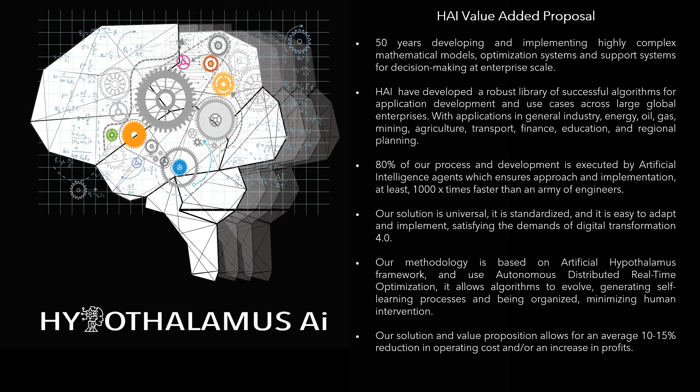It allows algorithms to evolve, generating self-learning processes and being organized, minimizing human intervention. Our solution and value proposition allows for an average 10 to 15% reduction in operating cost, and/or an increase in profits.

Oil supply chain optimization. The oil and gas supply chain is made up of 4 links: upstream, midstream, downstream and retail. The links are connected by multimodal transport networks.

The oil industry includes global processes of exploration, extraction, refining, transportation and marketing of petroleum products. The largest volume products in the industry are fuels, natural gas, fuel oil, and gasoline.

The distribution chain of petroleum products begins in refineries, and ends at the sites of consumption of different types of products.

Optimization solutions in the transport chain of petroleum products can be classified by their hierarchy: strategic, tactics, and operating. Several of these applications will be discussed below.

Hierarchical coordination of planning tools. It is traditional to organize decisions hierarchically into strategic, tactical and operational. The operational decisions are divided into scheduling and advanced optimal control.

However, due to the technological progress generated by Industry 4.0, mainly in relation to smart metering systems, nowadays we can talk about a new type of online optimization modeling: real-time distributed optimization.

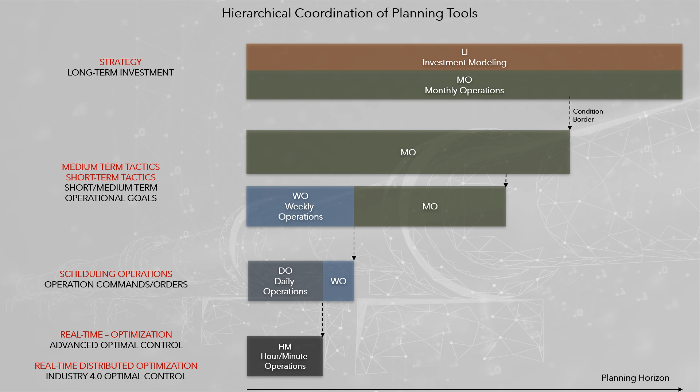The modeling strategy of HAI is that all models of a decision support system can communicate with each other.

HAI Oil meets all the software solutions developed by HAI in different areas of application of mathematical optimization models, oriented to planning and to scheduling operations, in different business of the petroleum product supply chain.

Oil enterprise-wide optimization integrates mathematical models for each of the links in the oil supply chain, in such a way to manage the planning of the supply chain with a holistic vision.

The design of HAI Oil EWO was the result of work done for a multi-business oil company. The union of models, and their coordination, forms the hypothalamus of an oil enterprise.

The current computational power allows us to model the supply chain in detail, considering individually all the systems that compose it. This allows us to visualize all the existing bottlenecks that affect the maximization of economic gains.

All models developed by HAI, to support decisions in the oil industry, are interconnected through an information system. In this way the construction of the artificial hypothalamus is a question of joining the equations that make up the different models.

Oil transport systems optimization corresponds to a general model, common to all types of oil products: raw, refined, natural gas and biomass, which represents the process for a specific system, including particular equations when required.

It considers 2 types of transport modes: pipes and multimodal vehicles, like vessels, barges, train tanks, and/or truck tanks. The integrated transport system can be conceptualized as the junction of pipe and vehicle routes, which interconnect multiple terminals.

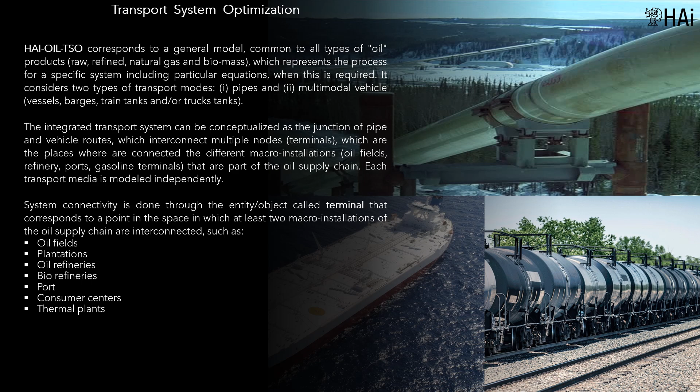System connectivity is done through the terminal, a node, that corresponds to a point in the space in which at least two installations are interconnected, such as oil fields, plantations, oil refineries, biorefineries, ports, consumer centers, and thermal plants.

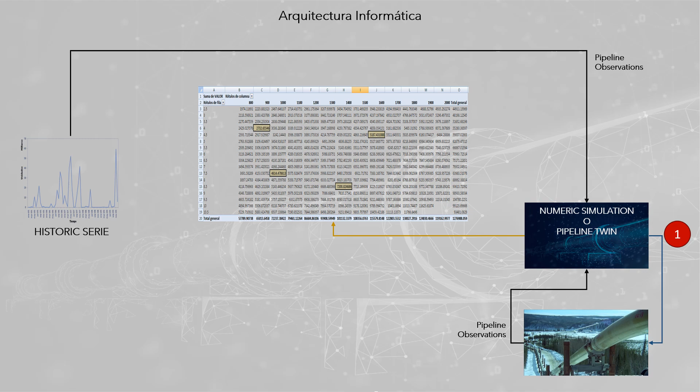Validate and correct advanced analytics models, mainly optimization models. State estimation models the prediction or estimation of the variables that represent the state of the system. These can be pressure, flow, RPM, roughness, density, etc., and physical model parameters: estimation of the parameters involved in the equations that represent the physical system, and which are subject to uncertainty.

It is considered that the appropriate methodology is the Kalman filter, KF, including some of its variations and extensions. KF is, perhaps, the oldest, and most robust, methodology of hybrid predictive AI.

The numerical simulation model can be used to generate synthetic operation samples, as it is assumed to correspond to the exact representation of the system, and thus enrich the database, very useful in the case of young systems with few historical measurements.

Prescriptive analytics. To optimize, the following models are required: the operation, dispatch, of the pipeline, at least 1 or 2 days in advance. This implies a real-time operating model, whose planning horizon is divided into periods of hours, fractions, and which can be redispatched at any time, and the transport of hydrocarbons in relation to nomination, DRA dosage, energy consumption month by month.

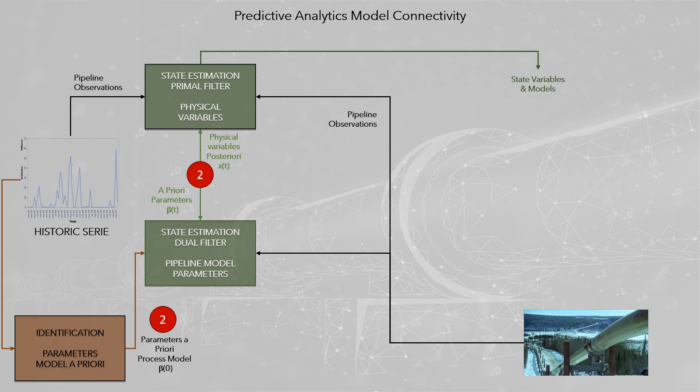Data-based algorithms only consider the database of observations, historical or synthetic, to determine the dynamic prognosis of the physical process. Normally, the related professional is a data scientist.

Model-based models are based on the numerical simulation model, which must be fitted by means of algebraic expressions, to be expressed as a system of stochastic differential equations, or finite differences, or finite elements. This requires an expert in the field of interest, in this case fluid mechanics, mainly in the transport of petroleum products.

The integration of the two approaches gives rise to hybrid predictive analytics, which can be considered as the appropriate method, that takes advantage of the mathematical knowledge of the physical system, and historical information.

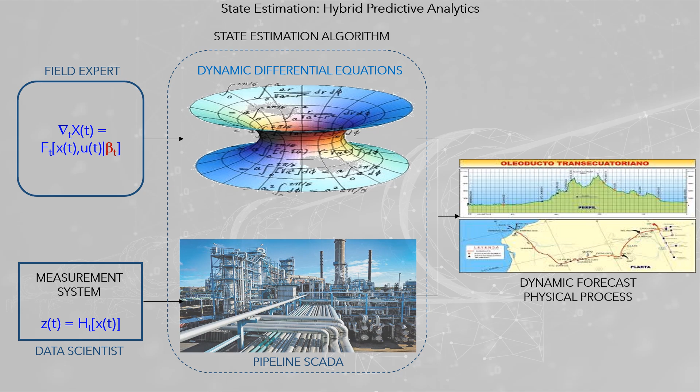The most well-known method, and most used, for more than 65 years, is the Kalman filter. The state estimate describes the system based on state variables, characterized by discrete, empirical probability distributions, and dynamic, empirical, probability distribution functions that evolve over time.

Forecasting, predictions about the future, and filtering, predictions for the present. In a system under uncertainty, correcting the past may be just as important, if not more so, than forecasting the future and estimate the present.

Examples of applications of the Kalman filter in pipelines are system monitoring, parameter calibration, leak detection, and maintenance following PHM methodologies.

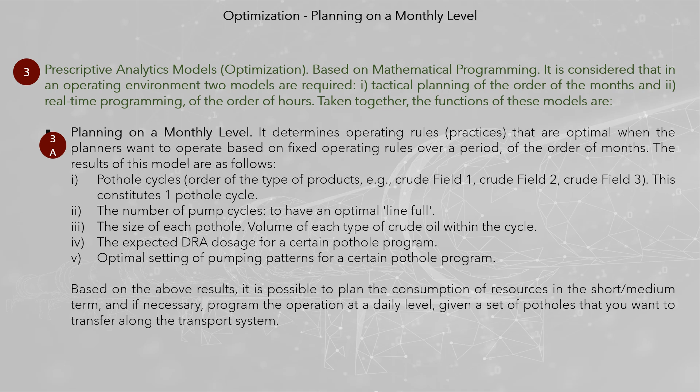Based on the above results, it is possible to plan the consumption of resources in the short-medium term, and if necessary, program the operation at a daily level, given a set of potholes that you want to transfer along the transport system. Daily scheduling determines the optimal operating conditions for a planning horizon of the order of days.

Specifically, it is expected to define operation schedules up to 3 or 4 days in advance. The results of this model are as follows.

Pumping plan at each pump station, optimal pump configuration pattern for the pump stations, and RPM at each pump. Contribution of DRA at injection points, in each period of the planning horizon, and the flow and pressure variables along the pipeline, which can be visualized in the pipeline digital twin.

The two models share equations and processes and differ in the specific characteristics of monthly, tactical, and daily, real-time, planning. The objective function of the models may vary according to the criteria of the decision maker, as well as minimize cost of operation, minimize energy consumption, and maximize oil products transfer.

The models, together or individually, can be used to support other decisions related to the operation of the transportation system. For example, supporting the ATP, available to promise, decision to accept or refuse transport operational volumes for customers who request it, without having a prior agreement.

To solve the mathematical problem of optimizing prescriptive analytics of a system, several approaches can be used: mental models, intuition and goodwill, simulation, physical model plus human reasoning, meta-heuristics, smart rationing, machine learning, experiences, best practices, and mathematical programming, physical model plus optimization mathematics.

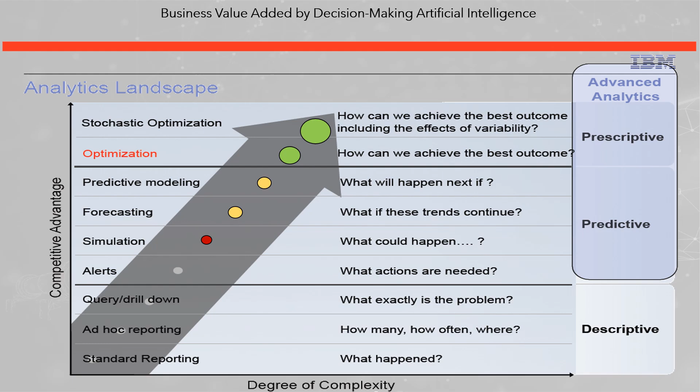Pipelines planning and scheduling. Compared to other transportation modes, like road, railroad and vessel, pipelines are the safest and most economical way of conveying petroleum products over long distances, day and night.

During the last two decades, operational multi-product pipeline scheduling has gained increasing attention. The problem of optimizing pipelines involves safe, reliable and economical operation, in which, for each moment of the planning period, the flows, pressures and configurations of the pumping stations must be determined, according to the different types of products that must be transported through the pipeline network.

The goal of the operation moves between two criteria: minimize energy consumption, an environmental criteria important to preserve the sustainability of the planet, and minimize the cost of energy, an economic criteria important in energy markets where rates change throughout the day.

On the other hand, the technical operating conditions, hydraulic conditions along the pipelines and at the pumping stations, must be respected regarding the flow of multiple different batches that must flow through a network of pipelines that involves the synchronization of multiple sections connecting several production fields, refineries, and ports.

The transportation system has two fundamental components: the pipeline system and the pumping stations. The planning and scheduling of transport operations of products through pipelines, oil and refined products pipelines, aqueducts, gas ducts, and mineral pipelines, is done using three coordinated models.

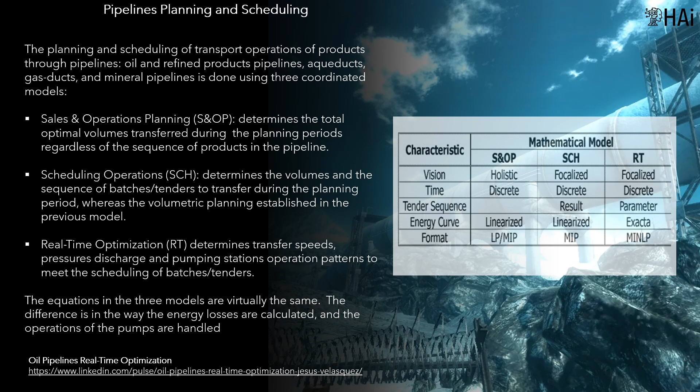Real-Time optimization, RT, determines transfer speeds, discharge pressures, and pumping station operation patterns to meet the scheduling of tenders. The equations in the three models are virtually the same; the difference is in how the energy losses are calculated and how the operations of the pumps are handled.

Discrete time and continuous time modeling. There are two alternatives for modeling operations scheduling: discrete time models and continuous time models. Continuous time modeling coordinates in detail the beginning and end of all activities that are part of an operations plan.

The conceptualization of this modeling is generic, in the sense that it can be applied to any detailed operations programming of a production system. The effort in modeling is greater than in discrete time, and it is less known by mathematical modelers. Its direct application is in real-time models.

Discrete time modeling divides the planning period into periods, usually of equal duration, and determines the average conditions in which the production system must operate. This modeling is better known, and traditionally used for tactical planning.

If greater precision is required in the results, the duration of the periods must be decreased, which increases their number, which entails problems of greater dimensionality.

Any of the above methodologies may be useful in solving real problems. The suitability of its use is determined only after a detailed analysis of the matrix structure of the optimization problem is performed. The real-time models include nonlinear modeling that determine the amount of energy consumed based on the flow of products in the system.

In aggregated models, when multiple types of products can be transported in the pipeline, the total transport time must be divided into the time used to transport each type of product at different transfer rates.

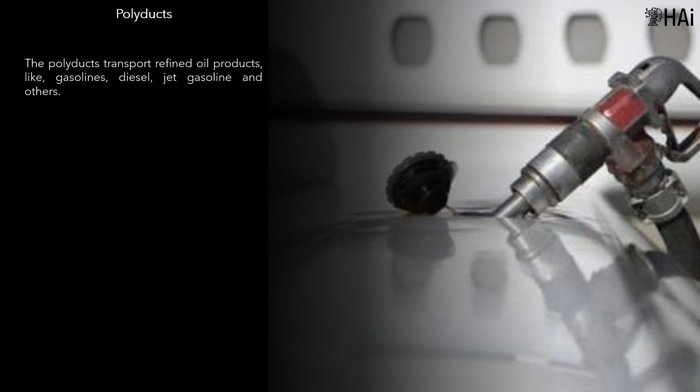Three types of pipelines exist: oil pipelines, which transport crude oil from oil fields and ports; polyducts, which transport refined oil products like gasolines, diesel, jet fuel and others; and gas pipelines, which allow combustible gases, natural gas, and liquefied petroleum gas, to be transported on a large scale and over a long distance.

The optimization mathematical models for pipeline transport systems can be used with one of the following objective functions: minimum power, minimum cost, and maximum flow.

Optimization strategy. The problem-solving methodology must speed up the optimization process. The chosen method is based on problem breakdown for the different periods that make up the planning horizon.

The synthesis of the behavior of pumping stations by means of a convex hull for variables that synthesize their optimal operation as a function of pressure, P, and flow, Q, for a given type of product associated with the batch, and coordination of the optimal solution using a Lagrangian coordination scheme.

The purpose of this is to iteratively solve significantly simpler problems that allow solving the original problem in significantly shorter computation times. After several analyses and numerical experimentation with mathematical models that represented the detailed problem, the following design principles are reached in order to make the solution of the problem viable as specified.

Split and decompose the problem into multiple problems of lower dimensionality in order to obtain the solution based on an iterative process. Maintain the format of the problems as linear or quadratic to take advantage of solvers specialized in this type of problem.

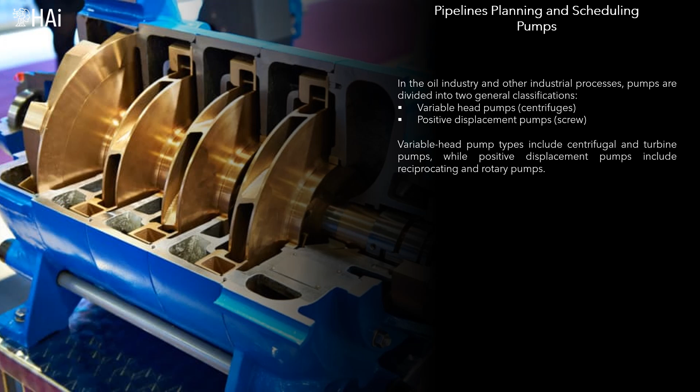The screw pump is one of the commonly used rotary-type pumps in the oil industry, and is mainly used in low-flow operation, where the efficiency of a centrifugal pump would be very low. On the other hand, the versatility in handling high-pressure heads makes the centrifugal pump the most used in industrial applications.

The effect of a pump on a system is to increase total energy. The action and operation of a pump is defined in terms of its characteristic curves. These curves relate the capacity, or flow, of the pump, in volume units per unit of time, versus the discharge pressure.

The equation that represents this ratio is obtained from the characteristic curve of the pump, which is provided by the manufacturer. This curve is generated for a pump rotation speed and for a characteristic viscosity of a reference product, usually water. This implies that, to determine the coefficients of the actual pumping curve, it is necessary to adjust the coefficients of the characteristic curve, based on the viscosity of the fluid that is pumped.

If the pump rotation speed changes, adjustments must also be made to determine the actual operating conditions of the pumping station. When a defined flow is required, and knowing that the system curve varies, it is necessary to affect the pumping curve, and thus find a new point of operation that meets the safe flow and pressure needs for the system.

The pumping curve can be affected in different ways; each pump with a variable speed motor can affect its pumping curve by changing the rotation speed. The figure shows three pumping curves for different rotation speeds of the engine associated with the pump, usually measured in RPM.

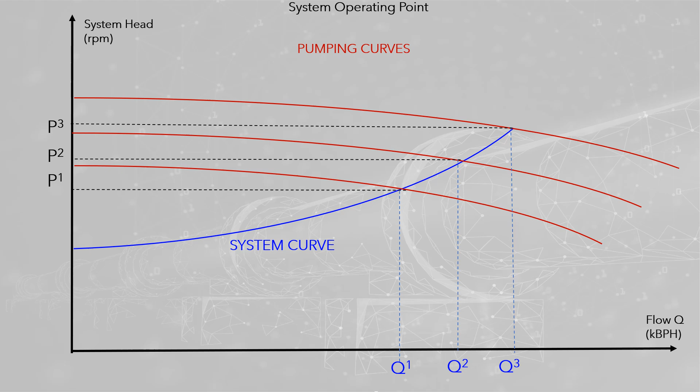The curve presents the relationship between energy consumed, or outlet pressure, and output flow in a pump. The relationship is exponential, implying diseconomies of scale in energy consumption as a function of flow. In theory, the pump has no limit in flow, but for an infinite flow rate, it would require infinite energy.

On the other hand, it is normal that there is a minimum flow rate, so that the pump begins to operate. The curves depend on the product transported. To the extent that it is heavier, denser, more power is required for the same flow. This applies to petroleum and petroleum products, that is, the curve depends on the API grade.

A pumping station is composed of multiple pumps, usually of the same type. While the atom of the system is the pump, it is necessary to analyze the behavior of the station as a machine, whose function is to pump a product at a certain transfer rate and at a given pressure.

The pumping curve is determinant of the operation of the pumping stations. A way to affect the pumping curve is by setting up a pumping pattern at a pumping station where there are multiple pumps. Configuration shapes are two: in parallel, and in series.

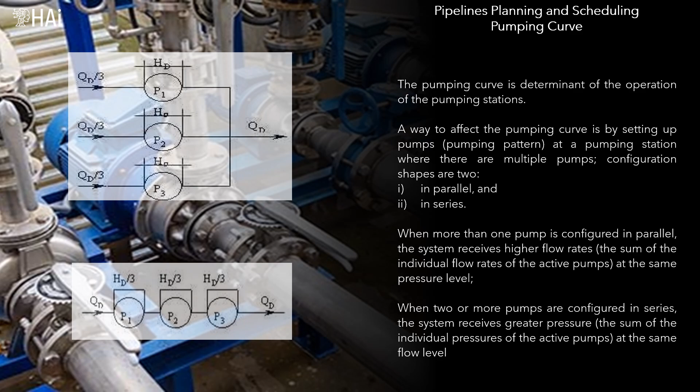In parallel, and in series. When more than one pump is configured in parallel, the system receives higher flow rates, the sum of the individual flow rates of the active pumps, at the same pressure level.

When two or more pumps are configured in series, the system receives greater pressure, the sum of the individual pressures of the active pumps, at the same flow level.

There are multiple operating patterns to configure the pumps of a pumping station. Its discrete character implies that selecting the more convenient one corresponds to a combinatorial mathematical problem. An aspect to consider is related to the type of pumps and the operating restrictions of pumping systems.

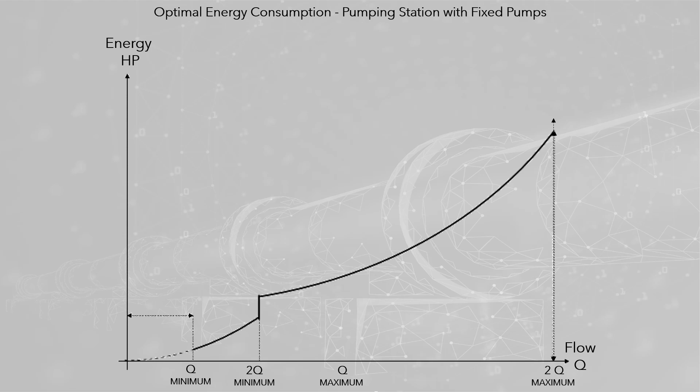The behavior is different with fixed pumps, as they cannot regulate the minimum flow rate, and must lose energy in a dissipating valve that allows excess energy to be released. The two cases involve non-convexities in the optimal consumption curves.

It can be noticed the flows that force the ignition of a new pump, which generates a discontinuity in the curve. This complicates the solution of the problem, since for such flows, the curve has two values.

A fundamental aspect of optimization models is the definition of the feasible zone. In most problems this is not complicated. However, in the case of pumping stations, it is necessary to carry out a detailed analysis. The greatest complexity is generated because the feasibility zone depends on the configuration of the pumping station, making the feasibility zone a disjunctive constraint.

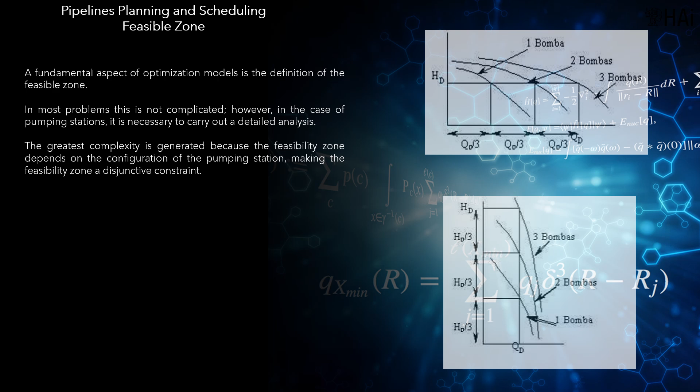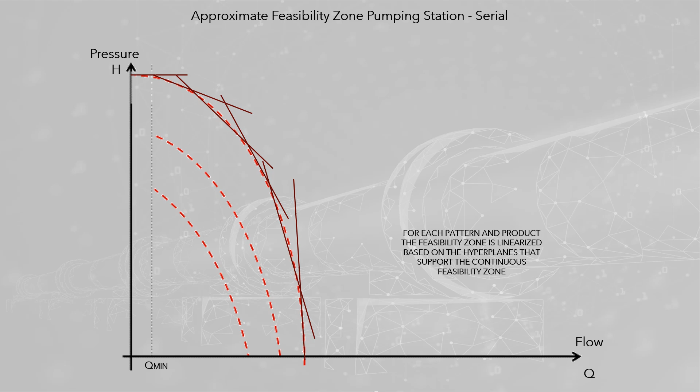Given the non-trivial form that gives rise to calculations, to represent the pumping feasibility area, the pump curves can be replaced by an algebraic function based on parameters, estimated through a least squares model. The polynomial function, or directly the empirical function, may be approximated by a piecewise linear function. For each pattern and product, the feasibility zone is linearized, based on the hyperplanes that support the continuous feasibility zone.

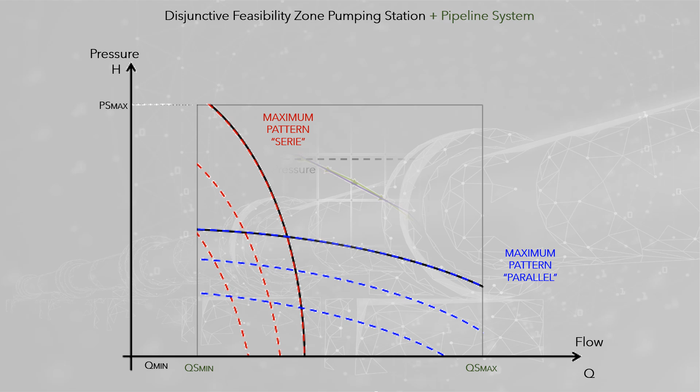The above feasibility zone must be intersected with the restrictions imposed by the pipeline, usually maximum limits on flow and pressure. The graph includes the limits in flow and pressure, due to the pipe.

The rectangle determines the feasibility zone for the pumping of mix oil. This indicates that the limitations in the pumping of mix oil are due to the pipeline. In the case of heavy oil, there are limitations due to the pipeline, and due to the pumping station.

The operation of a station is determined by the following decision variables: pump configuration, in series or in parallel; engine speed, RPM; and flow rate and pumping pressure.

The configuration of the pumping stations is a central part of the decision-making process as, depending on the pumping pattern, the combined action of the patterns makes it possible to meet the flow pressure demand in multiple ways. The optimization requires a detailed hydraulic model, at the level of each type of pump used in the pumping system, and for each type of product being pumped.

Considering the integral optimization of the entire pipeline, using large-scale optimization methodologies, partition and decomposition, the operation of each pumping station must be optimized through a mixed integer linear programming model, MILP, that minimizes the amount of energy required to dispatch a batch QP, for each type of oil.

Associated with each point of the grid, the following data is stored in an optimization database: the optimal consumption, the operating pattern that produces it, the dissipated pressure in the valve, unused available energy, and the RPM of the variable speed motors.

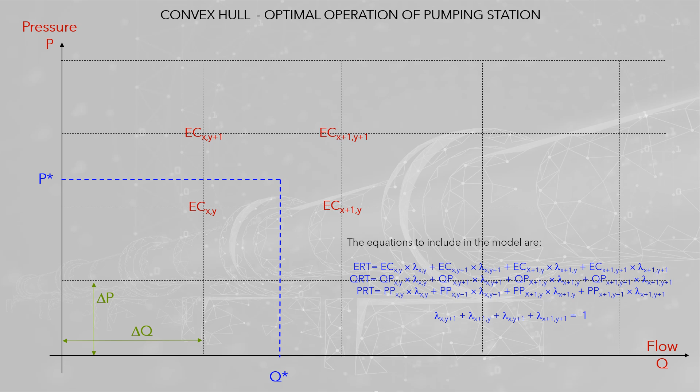If the envelope is convex, its incorporation into other models generates linear constraints. If it is non-convex, it implies the inclusion of binary variables, and will generate an MIP problem.

The integrated optimization of pipeline systems requires that all the pumping stations must be considered jointly. For real systems, it becomes a highly complex mathematical problem. For this reason, it must be faced using large-scale optimization methodologies, based on the partitioning and decomposition of the problem.

The monolithic approach, for oil pipelines, optimization seems to be an impossible way, since the combinatorial character of the problem can make it impossible to solve in reasonable times.

The first step to the decomposition of the problem is the generation of the convex hull of all pumping stations. This process involves extracting from the monolithic model the model of the pumping stations. Using this model, convex hulls will be produced.

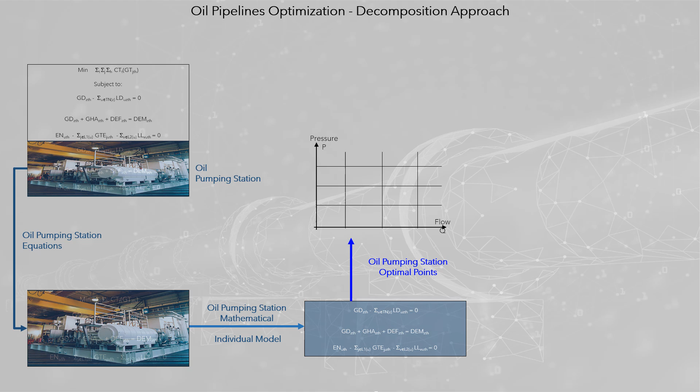This process involves extracting from the monolithic model the model of the pumping stations. Using this model, convex hulls will be produced. The results of the process must be stored in a database for later use in the pipeline system optimization model.

The integral model must incorporate the equations that allow working with the convex hull to determine the flow and pressure for each product that flows through the piping system.

The process of generating the convex hull can be done offline, prior to the use of the optimization model. If the APIs of the products are constant, as in the case of the refined products, the convex hull can be used for multiple runs of the optimization model.

When it changes frequently, new convex hulls must be generated as products with new APIs appear, as is the case with crude oil. Pipelines energy modeling.

A pipeline consists of sets of lines. The lines join two main nodes of the pipeline: pumping stations, and product terminals where there are storage tanks. Lines are composed of sets of sections that join nodes.

Each section has its own physical characteristics: slope, rugosity, thickness, length. The main nodes are characterized by the industrial infrastructure located on the node. All nodes are linked to a geoposition in the terrain.

The batches begin to flow along the first section of one line of the pipeline, and must therefore be linked to the line through which they enter the system. The matter and energy continuity equations must be met on all sections and nodes.

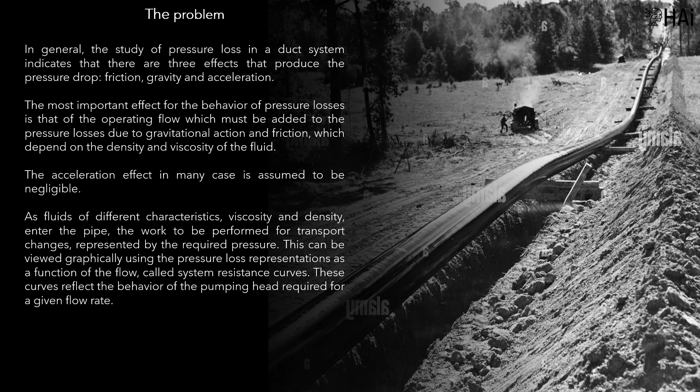The most important effect for the behavior of pressure losses is that of the operating flow, which must be added to the pressure losses due to gravitational action and friction, which depend on the density and viscosity of the fluid. The acceleration effect in many cases is assumed to be negligible.

As fluids of different characteristics, viscosity and density, enter the pipe, the work to be performed for transport changes, represented by the required pressure.

This can be viewed graphically using the pressure loss representations as a function of flow, called system resistance curves. These curves reflect the behavior of the pumping head required for a given flow rate.

The pipeline height profile is a determinant of the energy required to transport a certain volume of a specific product, at a certain transfer rate.

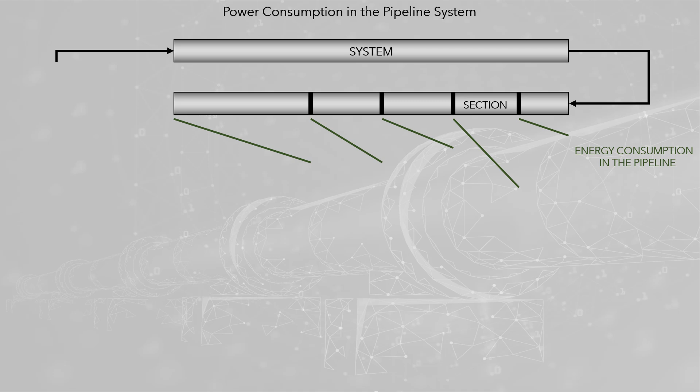The energy losses in the sections depend on their characteristics, the type of product, and the transfer rate, or flow. They are independent of the profile of the pipe. Energy losses as a function of flow are exponential.

The energy generated by the pumping stations provides the energy required for the transport of the products, to the extent that the energy in the pipeline is consumed. The energy profile in the pipe must always be positive, so that the product can flow.

There are multiple topologies to connect the pumping system to the pipe system. For real-time operation, this connection is very important. For tactical planning, it is less important, and may be approximated.

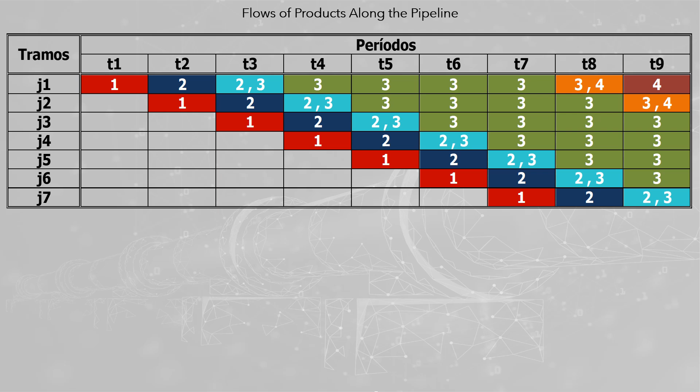Optimizing batch sequences: the objective of modeling is to determine the sequence of batches that should flow in the pipeline. For discrete time models, the result is a matrix, sections by periods, which indicate the batches that occupy each cell of the matrix. This implies that the mathematical model must establish the energy loss curve of the mixture, considering the operation of the pipeline, as presented in the diagram.

Optimizing batch sequences: the batch sequence optimization problem is complicated by its combinatorial character, with precedence constraints. Precedence restrictions reduce the domain of combinatorics, since they do not allow all combinations. This facilitates the solution of the problem but leads to greater complexity in modeling.

An example of this type of constraint is the one that does not allow a product of lower quality and cost, like kerosene, to go in the batch previous to a product of higher quality, like jet gasoline. This prevents contamination of products.

These problems are of the MIP type, and can be solved by mathematical programming, or by constraint programming. HAi has selected to work with mathematical programming.

Temperature impact optimization: the impact of temperature in pumping oil products. Due to seasonal variation, the average line temperature may change in time and space. As shown in the next images, viscosity of crude oil is a strong function of API gravity and temperature. This affects the amount and cost of energy, and the transport capacity. At very low temperatures the system may stop operating.

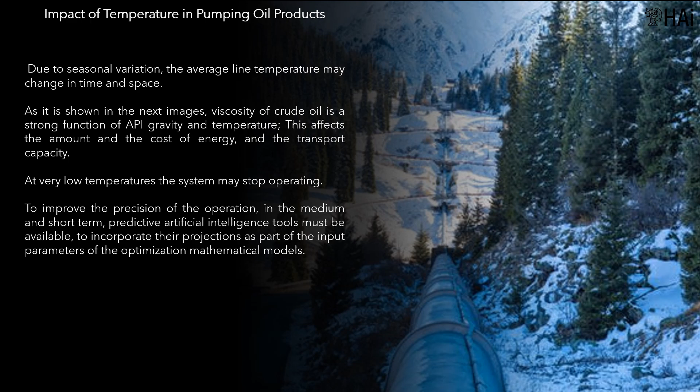To improve the precision of the operation, in the medium and short term, predictive artificial intelligence tools must be available, to incorporate their projections as part of the input parameters of the optimization mathematical models.

Effect of temperature on total pump power requirement. The analysis indicates that for an oil pipeline, the pumping power requirement varies as the crude oil degrees API changes. Increasing line average temperature reduces the crude oil viscosity. The reduction of viscosity results in higher Reynolds number, lower friction factor, and in effect lower pumping power requirements. An 8-degree Celsius temperature difference can imply about 25% difference in energy consumption.

This impact is not limited to pipelines, it also affects production fields.

Drag reduction optimization: drag reduction is a physical phenomenon that causes friction to be reduced, and fluid flow to be increased. Chemicals that reduce drag are known as drag-reducing agents, DRA. Several polymeric compounds can reduce the wall shear stress of flowing liquids at low concentrations.

Thus, the use of DRA has the following advantages: increased pipeline capacity, the throughput; savings in pumping power; pressure reduction with the associated reductions in pipe thickness and pressure surge; and reduction in pipe diameter in the design phase, as well as the number or size of pumping facilities.

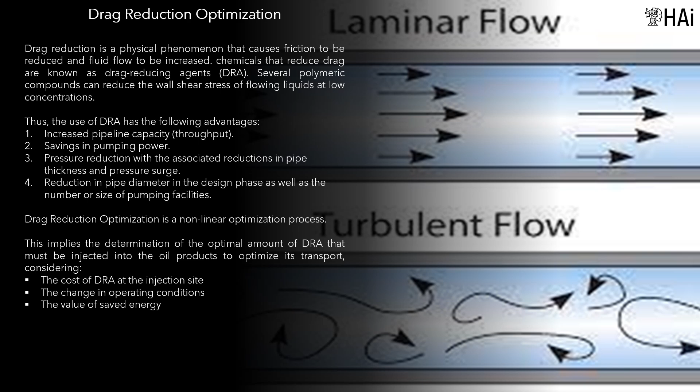Drag reduction optimization is a nonlinear optimization process. This implies the determination of the optimal amount of DRA that must be injected into the oil products to optimize its transport, considering the cost of DRA at the injection site, the change in operating conditions, and the value of saved energy. The existence of DRA dates back 50 years, when Conoco Incorporated patented the product.

Its first commercial use was in the Trans-Alaska Pipeline in 1979, where a 50% drag reduction was achieved, increasing the capacity of the pipeline from 1.45 to 2.1 Mbpd (Berger et al., 1982). This resulted in eliminating the need for installing two pumping stations, which were planned to achieve the mentioned increase in capacity.

Since that time, DRA has been used in many petroleum product pipeline installations. From a reference point of operation, the use of DRA can produce two effects: reduction of the amount of energy required to transfer the batch volume at the same transfer rate, lowering the cost of energy, or increasing the transfer rate while maintaining the same energy consumption, increasing pipeline capacity.

This drag reduction optimization involves an empirical, experimental process to determine the variations in operating conditions, pressure and flow, considering the conditions of the pipeline and the pumps, and the impact on the operation of the concentration in weight and volume of the type of DRA used.

To do this, a model of the pipeline, a digital twin, must be built considering the theoretical mathematical equations of the flow, and validate them with the controlled measurements, using a model supported by artificial intelligence.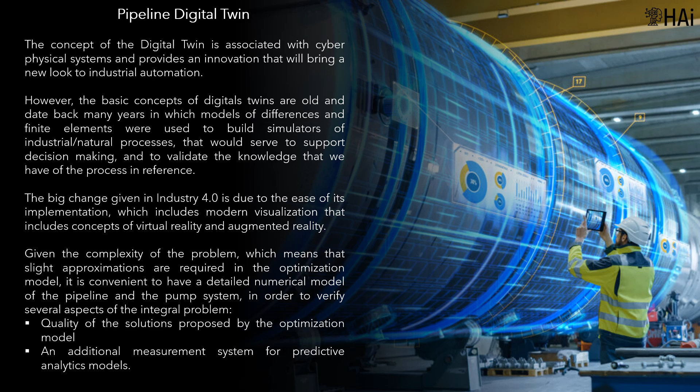The big change given in Industry 4.0 is due to the ease of its implementation, which includes modern visualization that includes concepts of virtual reality and augmented reality.

Given the complexity of the problem, which means that slight approximations are required in the optimization model, it is convenient to have a detailed numerical model of the pipeline and the pump system, in order to verify several aspects of the integral problem: quality of the solutions proposed by the optimization model, and an additional measurement system for predictive analytics models.

The planning of a polyduct aims to determine goals, not transport orders, for the transportation of oil refined products in the medium term, that is, in the order of weeks or months. The results sought are defined goals for the sequence of batches to be dispatched and define their technical specifications: volume, transfer rates, and DRA injections.

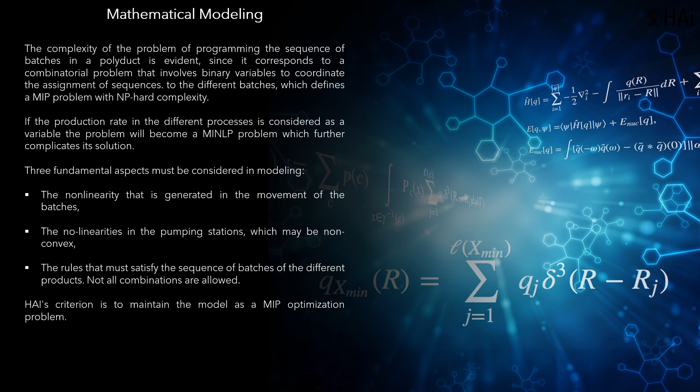If the transfer rate is considered a variable, the problem becomes a MINLP problem, which further complicates its solution. Three fundamental aspects must be considered in modeling: the nonlinearity generated in the movement of batches, the nonlinearities in the pumping stations, which may be non-convex, and the rules that must satisfy the sequence of batches of different products. Not all combinations are allowed. The criterion is to maintain the model as a MIP optimization problem.

In the movement of fluids in the pipeline system, the fundamental nonlinear equation defines that the time of displacement equals the volume transferred divided by the flow rate. In this equation, the three variables are part of the decision problem, which entails a nonlinearity that complicates the solution of the mathematical problem.

The objective function must be considered to know the type of problem. It is assumed to be minimizing the cost of transport energy. The conversion of the transfer rate into energy implies another nonlinearity. If this function is continuous and has diminishing returns, the problem will be one of convex programming.

The mathematical modeling alternatives are: exact, which implies a nonlinear model, and approximate, which assumes discretized transfer rates and implies a linear model. In this modeling, the transfer rate is obtained through a convex linear combination of all discretized transfer rates, which correspond to model parameters.

The approximate movement of fluids implies that the modeler selects transfer rates to simulate the flows in the model. It is equivalent to dividing the line into lines, each with a fixed transfer rate, which linearizes the problem for each line, and the effective transfer rate is calculated as a linear combination of each of the transfer rates.

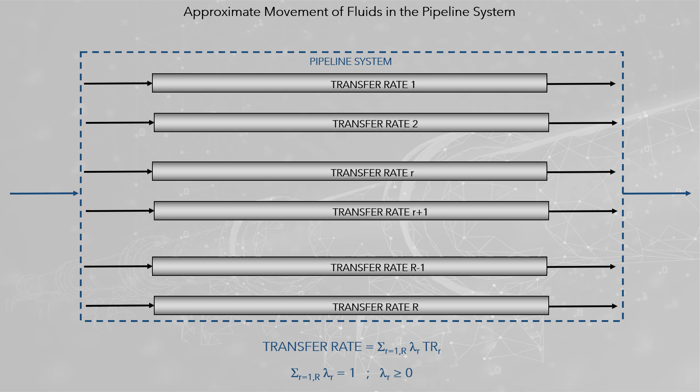The lambda multipliers represent the fraction of time during which the line operates at the associated flow. The approximation must be made for each line and applies to all sections flowing in the system during period t. This approach is appropriate when speed is required to obtain an approximate optimal solution, close to the real optimal solution. It is the case for tactical planning, but not for real-time scheduling.

The proposal for pumping station operations is to model the pumping system using a convex hull, calculated offline, which corresponds to a linear model. For those parts of the pumping operating system that involve discontinuities, and therefore nonlinearities, it is suggested to make approximations which guarantee convexity.

Planning based on previous experiences: discrete formulation of continuous processes. Due to multiple limitations that existed in the past, for example limited computing capacity, optimization algorithms still in the process of growth, lack of knowledge of high-performance optimization methodologies, and difficulty formulating complex math problems, approximate models were generated based not on an exact mathematical formulation, but on selecting one, or a combination of solutions, already proven, whose greatest quality is that they guarantee feasible solutions. For those old years, that was a wise way to face the problem.

This process is based on generating solutions to known scenarios, and formulating a simple optimization model which ignores the constraints of the problem, since they are implicit in the solutions analyzed. This approach, now questionable, entails cost overruns due to its inability to generate optimal solutions.

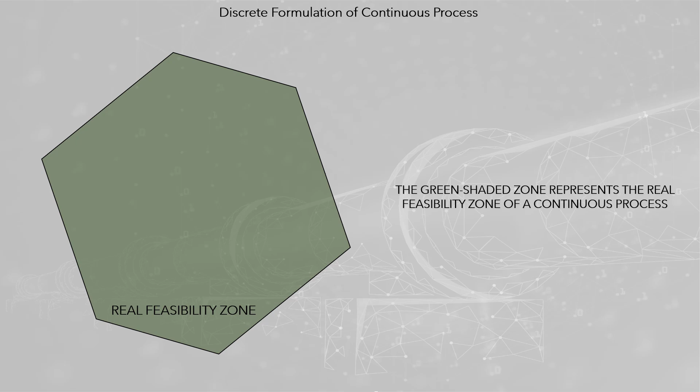To analyze the impact of this approach, consider that the green shaded zone represents the real feasibility zone of a continuous process. If a discrete formulation is used, that is, discrete solutions are assumed for continuous variables, the real feasibility zone will be reduced, affecting the optimization, so that the profits provided by the model will be seriously reduced, possibly reaching zero.

In the case of using a single solution, there will be no optimization, and the feasibility zone will be reduced to the point of the formula used. In the case of using two solutions, the feasibility zone will be reduced to the line connecting the two points that represent the formulas used. The solution shall be a point on the line that determines the convex linear combination of the two formulas.

In the case of using three or more solutions, the feasibility zone will be reduced to an area delimited by the points associated with the formulas. The solution will be a point inside the modeled feasibility zone, which can be expressed as the area containing all the convex linear combinations of the formulas used.

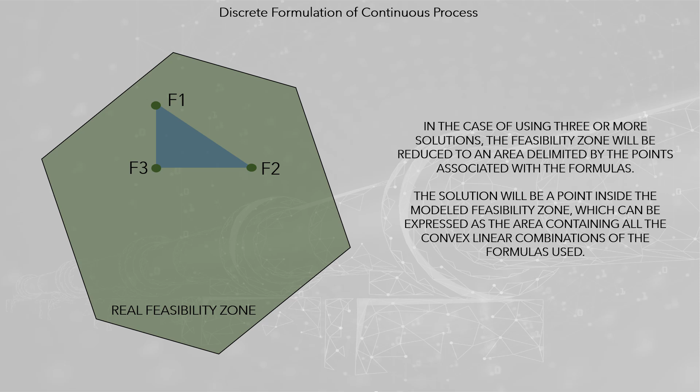To the extent that discrete solutions are incorporated, the modeled feasibility zone will approach the real feasibility zone. The quality of the approximation depends on the coverage made by the discrete formulas of the continuous space, something similar to what happens in the design of experiments. A greater number of points does not provide more information if they fall into the area defined by the convex linear combination, defined by the extreme points of the historical sample.

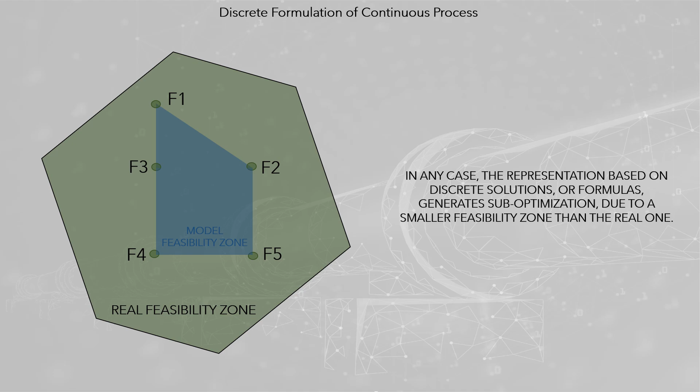No more points are required, more coverage is required. In any case, the representation based on discrete formulas generates suboptimization, due to a smaller feasibility zone than the real one. There are large-scale optimization methodologies, such as Benders' theory, which starting from an approximate feasibility zone are forming the real feasibility zone, to achieve the optimal solution.

In this case the solutions that should be incorporated are generated by an artificial intelligence based on mathematics, and not on the practices or mental models of humans.

In concrete terms, suboptimization implies lower ROI captured by mathematical models. You save a little money in mathematical complexity but leave important money on the table. It is a bad business.

Case: optimization of scheduling of multi-product pipeline and depot inventory. The following is a summary of the paper: simultaneous scheduling of multi-product pipeline distribution and depot inventory management for petroleum refinery.

The scheduling model consists of three submodels: a pre-processing submodel for regulating new feeding pipeline slugs, a TM handling submodel, and a product pipeline distribution submodel with consideration of depot inventory management.

The MPD-DIM could handle the mixed interface of oil products appropriately and economically through blending and distillation operations. Meanwhile, the optimization of multi-product pipeline transportation and depot inventory management could be simultaneously accomplished.

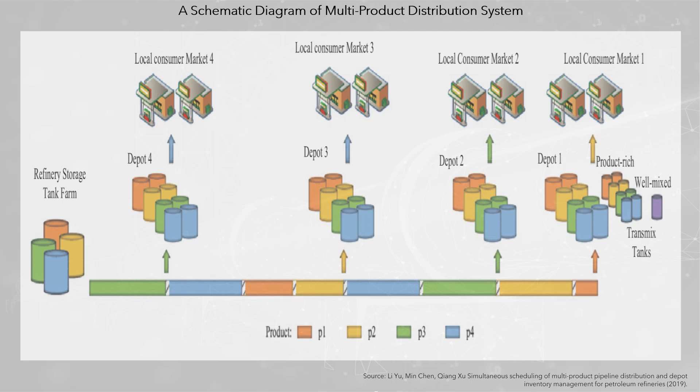The integrated planning of a pipeline system that links different streams in the oil chain is the central part of the enterprise-wide optimization of an oil company.

For a petroleum products transportation company, its business may be to efficiently transport petroleum products. But it can become more profitable, not to transport them. This is related to the definition of what is the product that is transported and marketed: oil and derived products that are physically transported, or the technical specifications that are transported in the products.

Natural gas transport is a good example. All natural gases have different energy content. What is used in thermal power plants is energy. Natural gas is a medium that contains energy. Commercial agreements are made on quantities of energy, and not so much on volumes of gas.

The technical, commercial characteristics of the product depend on the type of oil product that is moving along the pipeline, and the blending of these products in the terminals of the pipelines. It could be the case of moving a product to a terminal, to complement the technical specifications of the existing products in the terminal, mix them, and deliver them to the customer, depending on the commercial transaction.

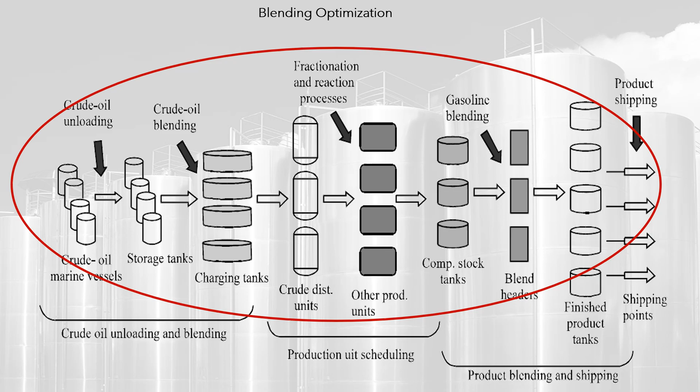On the other hand, there is the transport of derivative products. Integrated optimization of the entire oil blending chain implies a holistic model of the problem. This vision produces greater economic gains than its piecemeal modeling.

The model blend allows to plan transportation operations for multiple oil production systems, with a view to delivering crude oil blends to refineries and/or ports that are connected to the system. The system accepts any type of connectivity topology between facilities.

The supply of oil is given through fields producing different types of crude oil, with a predefined availability. This offer can be defined dynamically, considering the evolution of the oil producing fields' operations plans. It is also possible to consider buying crude oil in the spot market.

The demand for commercial crudes occurs in refineries and export ports. It is possible to buy crude oil in the spot market, in order to mix them and obtain new commercial oils. It can also be considered purchases or sales of oil futures, which must be respected.

The purpose of optimization is to determine the optimal operation of the system, in such a way as to maximize the utility produced, or to minimize the costs of satisfying a predefined demand. A terminal can be conceptualized as a machine that takes multiple oil crudes, mixes them, and produces multiple blended crudes.

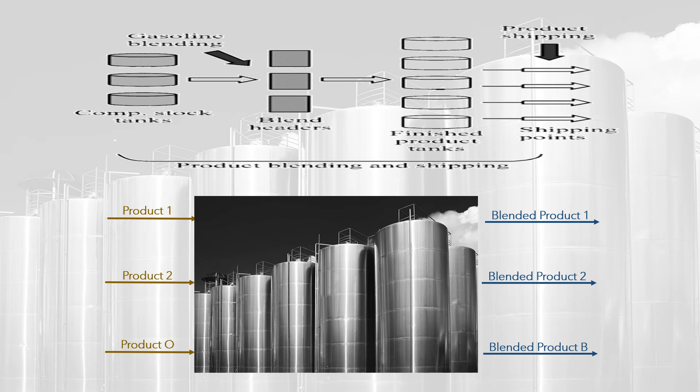The entities considered in the modeling are crude oil, oil field, oil terminal, tank, refinery, oil port, commercial oil, market, and regional market. An example is the modeling of an integrated system of production, consumption, distribution, and purchase or sale of blending oil. The features of this system are: oil is produced in the production fields, each field being characterized by the type of oil it produces.

Such oil must enter the oil distribution system that feeds export ports, through which commercial commitments to sell oil in the spot market, or the financial markets, or directly to the refineries.

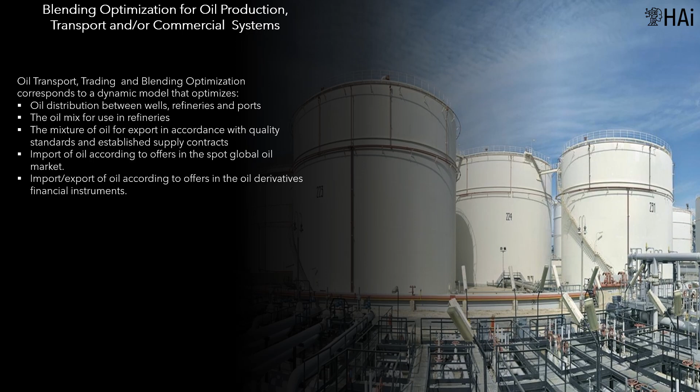Optimizing the blend of crude oil and petroleum products is a multi-million-dollar application. It can be coupled to the production of oil fields, in such a way as to establish optimal plans for production, distribution, export and import. In addition, blending processes extend to petroleum products, for example, lubricants.

Reducing quality target variance should be at the top of the list for refinery improvements. Deviations from quality targets should be minimized, to charge the pipe still with a steady mixture of crude oil. Steadier quality crude oil mixtures charging the pipe stills will also translate into steadier operations for downstream production units. It also makes good sense to run pipe stills with a constant flow rate for as long as possible.

Hypothetical benefit calculations. Total yearly savings in American dollars: quality target variability improvement such as whole crude oil sulfur, 2 million; reduced chemical injection, 100,000; distressed sale of crude oils from the refinery, 325,000; pipeline penalty charge for changes in sequence or timing, 75,000; spot opportunity for crude oil trades, 250,000; and reduced working capital, 100,000. Total year: 2,850,000.

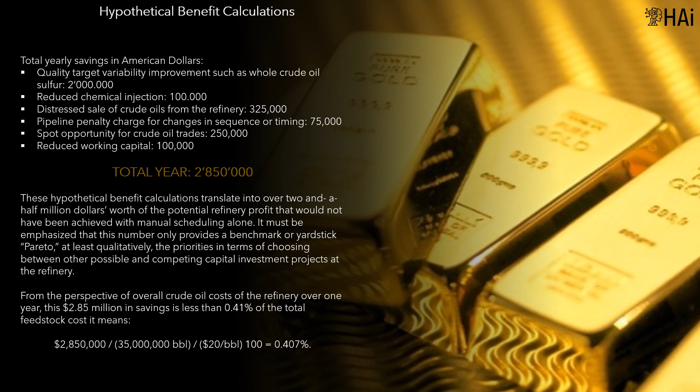From the perspective of overall crude oil costs of the refinery over 1 year, this $2.85 million in savings is less than 0.41% of the total feedstock cost.

Oil and gas pipelines nominations and bilateral contracts. The nominations are the agreements made by the carrier and dispatcher to transport oil, natural gas, and petroleum products, using pipelines. This process normally occurs within a long-term or medium-term contract, between the transporter and the dispatcher.

In turn, the contract of the dispatcher, who can be a distributor or a large consumer, is backed by contracts with end customers, and this process determines the demand for transport services that must be attended by the transport system operating company. Short glossary. Nomination: a request for a sender's transport service.

Nominated quantity refers to the volume that the sender requests to be transported from a point of receipt and delivered to a certain point of delivery for a period of nomination. This must be authorized by the carrier.

Nomination period: this is the period for which the dispatcher submits its transport nomination request. Cycle: subperiods into which the nomination period is divided, for example, days, weeks, fortnights, etc. Period represents the period to be nominated: month, week, day, or another period agreed between carrier and dispatcher.

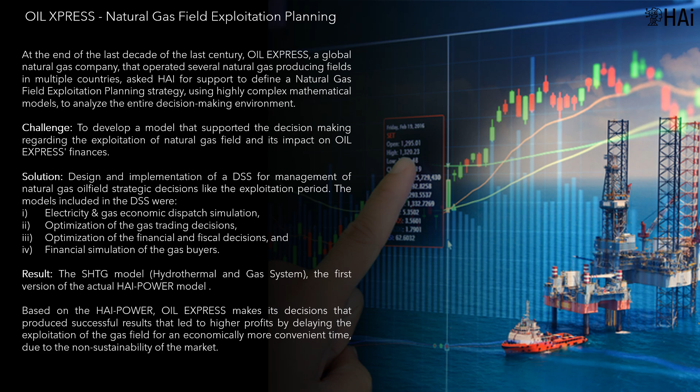Oil Express, Natural Gas Field Exploitation Planning, 1997: Analysis of the gas market for the electricity sector. The main study carried out with HAI was the analysis of the national gas market for the electricity sector. This is due to there being no alternative markets for natural gas other than national electricity generation.

There was pressure from the electricity regulator for generators and producers of natural gas to sign contracts for the purchase and transportation of natural gas to give firmness to the electricity sector. Oil Express's fundamental hypothesis: if the gas market is not sustainable, it makes no sense to sign bilateral contracts with electricity generators and to invest in extracting the natural gas, and the optimal strategy is to wait for the right moment in the future. The analysis was carried out using take-or-pay contracts as a basis.

The take-or-pay (TOP) is a contractual clause requiring the buyer to take delivery of a specific amount of goods or services from the seller or pay a fine if they do not. Thus, it protects the seller against potential losses if the buyer refuses to complete the purchase by a particular date. A TOP clause is common in energy industries, including oil, natural gas, mineral, and coal, seeking significant investment. It is also called the kill clause. The contract is normally signed before the companies start oil, natural gas, minerals, or coal exploration. Therefore, it is a type of offtake agreement.

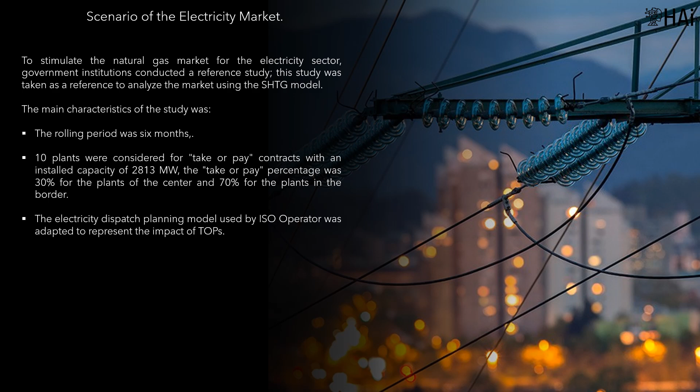The table presents the summary of the characteristics of the scenario studied by the regulator to stimulate the signing of contracts in the natural gas market. The percentages of TOPs fixed do not come from an optimization model; they were perceptions of what should be.

The chain of qualitative effects which derive from TOP contracts is relatively easy to foresee. The bid price of the thermal plants to the spot market will go down. This is because they have turned the variable cost into a sunk cost. In the extreme, it could reach zero. This will lead to an increase in the dispatch capacity of thermal plants, and the fall in spot prices.

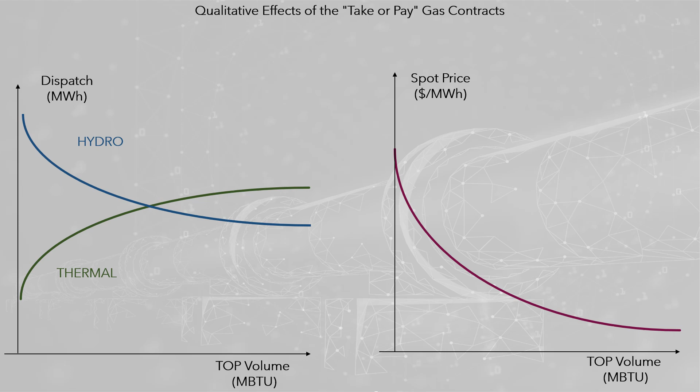But quantitative effects are not intuitive; they can't be calculated with an Excel spreadsheet. As the volume of natural gas contracted through TOPs increases, it can be expected that hydro plants will lose share, thermal plants will gain participation, and the spot price will go down. It is clear an economical resource, but not 100% reliable, hydroelectric energy, is being exchanged for another more expensive but more reliable, thermal energy. It should be considered as a risk premium.

From the point of view of income, revenues from hydro generators will decrease, and the change in the income of thermal generators cannot be evaluated a priori. Therefore, a mathematical model is required to evaluate quantitatively the natural gas market.

Modeling take-or-pay contracts. To carry out the study, five cases were implemented to consider the take-or-pay modeling. The following is the code associated with the modeling and description.

No take-or-pay, no contracts: free, optimized contract generation. Equations are included in the dispatch model, HAI-POWER, to accurately represent take-or-pay contracts.

Rolling minimum generation: the minimum generation of the thermal plant is forced during the rolling period, to ensure compliance with the contract. Monthly minimum generation.

The minimum monthly generation of the thermal plant is forced, to ensure compliance with the contract. More restrictive than the previous one.

MW KTE, fixed generation at the base. The thermal plant is forced to generate at the base, permanently, to ensure compliance with the contract. More restrictive than the previous one.

All forced generations can be implemented with an economic dispatch model, without requiring modifications to the model. All these imply losses for thermal plants, when the marginal costs of electricity are below the variable cost of take-or-pay.

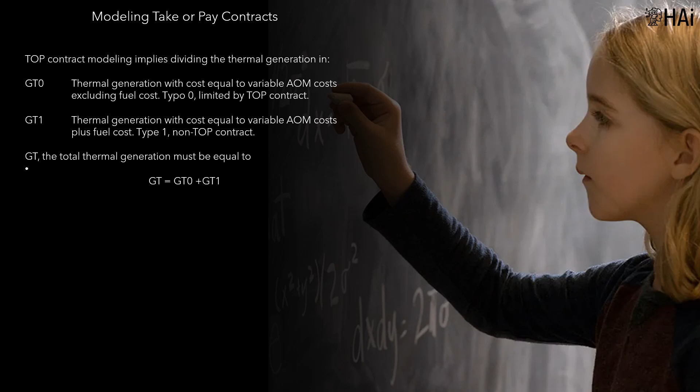Take-or-pay contract modeling implies dividing the thermal generation into GT0, thermal generation with cost equal to variable O&M costs excluding fuel cost, type 0, limited by the take-or-pay contract, and GT1, thermal generation with cost equal to variable O&M costs plus fuel cost, type 1, non-take-or-pay contract. GT, the total thermal generation, must be equal to GT0 plus GT1.

There is only one appropriate way to study take-or-pay contracts, and in general any bilateral contract: model the operations and the financial transactions as they are described in the contract. Approximations to this modeling will only bring economic losses for the generators and for society.

For example, trying to adapt an economic dispatch model by parameterizing the dispatch of thermal plants will bring negative consequences for all market agents. All forced generations can be implemented with an economic dispatch model, without requiring modifications to the model. But all these imply losses for thermal plants, when the marginal costs of electricity are below the variable cost of take-or-pay.

To quantify the financial impact of take-or-pay contracts, we can consider the estimated operating income for generators, defined as the marginal cost, a proxy of the spot price, multiplied by the generation.

Since the spot price goes down due to the take-or-pay, the highest value reference is the market with no contracts. In this case, for simplicity, the post-optimization financial impact has been evaluated, using the resulting dual variables as a reference.

However, it should be noted that HAI-POWER can solve an MPEC, mathematical problem with equilibrium constraints, in order to convert the financial impact into part of the optimization model, and thus obtain a more accurate view of the health of the market. Scenario aggregate economic results.

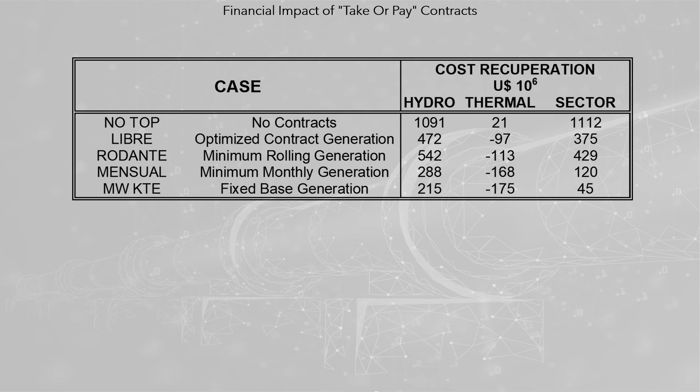In the case of this hydro generator, paradoxically its financial health does not depend on its own actions, but on that of other agents. If thermal generators assume a rational position, the financial health of the hydro generator will not be affected. But if they assume an irrational position, ignoring mathematical laws, the hydro generator can go bankrupt.

In simple terms, this defines an undesirable externality in a market, in which the errors of one agent can be paid by other agents. The golden rule is everyone pays for their own mistakes and takes advantage of their right decisions. The situation of thermal generators is different.

For the planning period analyzed, the costs of take-or-pay contracts cannot be recovered.

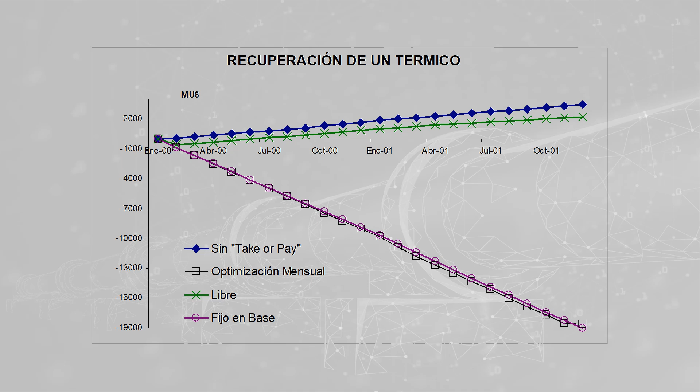The financial damage will be greater if decision handling is not based on specialized mathematical management models. The graph indicates a general crisis of thermal generators if the tops indicated by the government are signed. It shows that the financial health of a specific thermal generator may depend on its management capacity, and that if there is an exit, the generator can become profitable in a market in difficulties. HAI-POWER allows OIL EXPRESS to financially analyze all market participants, both potential customers and clients of competitors, enabling scientific market intelligence activities.

Considering that the proposal of tops made by government entities does not come from an optimization process, but were defined considering logic and good practices, HAI and OIL EXPRESS proceeded to adjust the value of the tops so that they approached an optimal value, and thus analyze the behavior of the market under these conditions. These adjusted values do not come from an optimization process; however, the HAI-POWER model can be used to determine optimal top values.

In the case of cost recovery of thermal generators, the situation is more complicated, since even the optimal values for the tops will generate problems of bankruptcy and liquidity, which will be more serious if the top values do not have appropriate rationality. This indicates that the electricity market cannot guarantee that thermal generators can pay the top contracts that are theoretically required by the government.

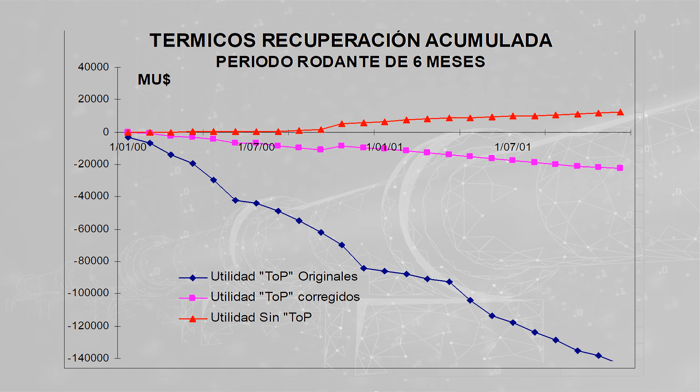The model turned out to be correct, since in early 1998 it detected the market crisis between 1998 and 2000, which led to bankruptcies of thermal generation companies.

Successful decisions: for its part, Oil Express has proven that there are no market conditions, meaning there does not exist a good set of profitable thermal generators that can pay for gas through ToP contracts, required to guarantee the extraction of natural gas. If it is a question of compensating the situation based on price, if Oil Express sells natural gas at high prices, it is possible that Oil Express must recover bankrupt industrial company assets. Everything seems to indicate that the optimal decision may be to delay the investment, waiting for a market with better conditions.

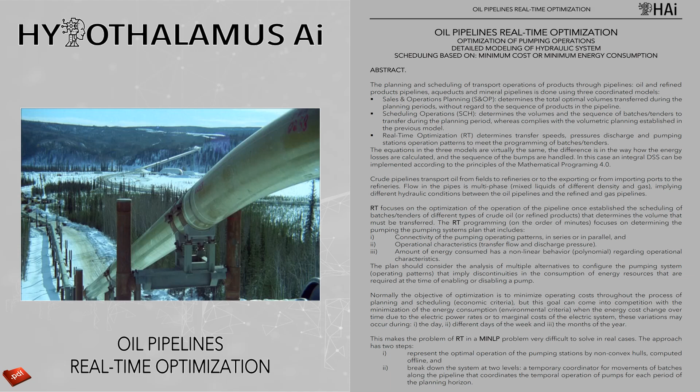Oil pipeline scheduling: the white paper Oil Pipelines Real-Time Optimization contains detailed information about the model described in this section. The work carried out by HAi is the result of empirical analysis of multiple implementation alternatives for solving the problem of optimal operation of an oil pipeline system, ensuring that the methodology implemented respects detailed hydraulic modeling of the pipeline and pumping station systems, and manages electricity rate schemes differentiated by time slots. The planning horizon is 72 hours of operation with a 10-minute breakdown.

The first version of the model ran on a personal computer in 2012.

The input data of the mathematical model includes lengths, diameters, thicknesses of pipes, mechanical strength, internal roughness, etc.; elevation profile of the lines; properties of main elements in each station, pumping units, control valves, load curves, efficiency, stages, NPSH, BHP, etc.; maximum and minimum pressures at various points; energy costs and schedules, where applicable self-generation and fuels required; detailed transportation program for a maximum period of 72 hours; default sequence of tenders and their volumes; and delivery times and physical properties of products such as density and viscosity.

HAi has developed an optimization mathematical model for real-time scheduling of oil pipelines. The process involved the following experimentation stages: implementation of a MINLP integrated model to try to solve the problem directly; implementation of a multi-level model based on the principles of Lagrangian relaxation coordination; basic models with MIP or MINLP formats, and implementation of a multi-level model with preprocessing based on interpolation principles through convex linear combinations of optimal preprocessed solutions for pumping stations; a basic model in MIP format; and cyclic movements based on gradients.

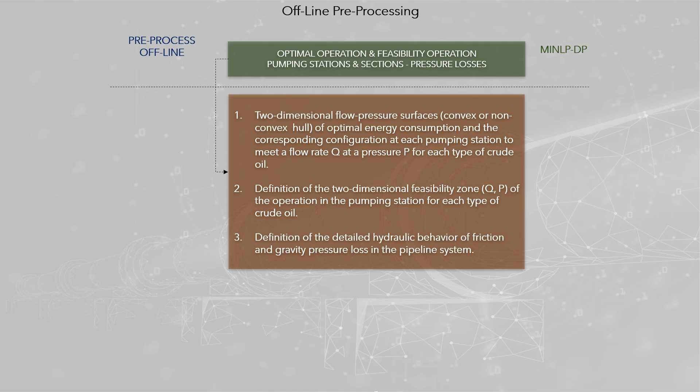Definition of the 2-dimensional feasibility zone, Q, P, of the operation in the pumping station for each type of crude oil, and definition of the detailed hydraulic behavior of friction and gravity pressure loss in the pipeline system. This information comes from the expert system, that stores the operating patterns of all pumping stations for all oil products.

The second stage is the online preprocessing, that focuses on the domain reduction of the possibilities in the pipes. It determines the possible batches that can pass through a section J during a period T. In this way, the dimensionality of the model is reduced, since only the feasible tender section period combinations are considered, and this preprocessing depends on the data of the run, and must be done before starting the optimization process.

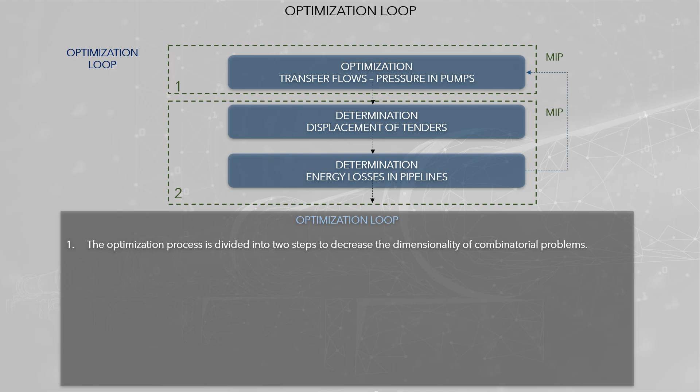The third stage is the optimization loop. The optimization process is divided into two steps, to decrease the dimensionality of combinatorial problems. The first step has three sub-steps.

It ignores the displacement of the tenders along the system, and therefore approximates the friction losses in the sections in the different periods, which are calculated based on an estimated curve that is assumed to reflect the characteristics of the tenders that is passing through the section during a period.

It simultaneously considers all the periods of the planning horizon, and all the sections of the pipeline system, in order to obtain an optimal solution, ensuring that the pressure constraints are met along the pipeline system, and the flow of products through the pumping stations is detailed, that is, it considers for each period the tenders that are passing through the station.

The second step has three sub-steps. It determines the displacement of tenders along the pipeline system, thus determining which tenders are passing through each section for each period, and based on the above information, it is determined which is the best curve of friction losses that

represent what happens in a period for each section. This information is fed back to the first step. The problem process of determining energy losses in pipelines corresponds to a separable process, and therefore can be solved in parallel, for every period of the planning horizon.

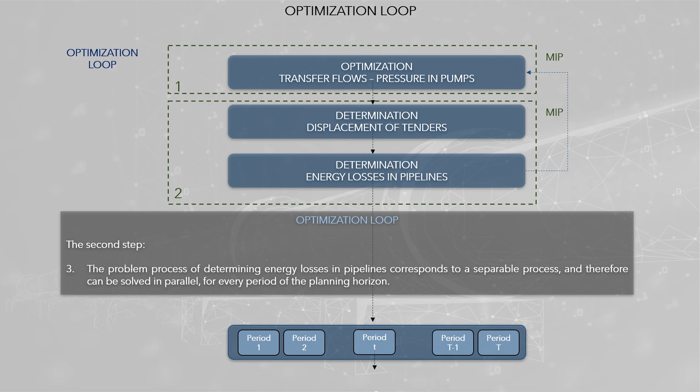Once the iterative optimization process has been stopped, the fourth stage is post-processing, and it is related to optimization of pumping stations operation. It has two steps.

The algorithm proceeds to review for each period, and for each pumping station, the optimal conditions of the operation, according to the flow pressure pairs established as optimal scheduling, and the algorithm corrects the approximation that is generated due to

the size of the grid, that is used to linearize the optimal consumption, in the optimization loop step, since during this process the problem is solved for exact values of the pumping plan, not for values of the grid limits.

The image shows the optimization loop flowchart.

Computational solution. The current state of the computer technologies involves the integration of edge computing and cloud computing to implement systems with multiple highly complex mathematical models that can be run in parallel.

The implemented solution involves two phases of computer operation. Offline, it occurs when computers are not engaged in the optimization process and are dedicated to generating information that will be used on the next occasion that is required to optimize. During this phase operate tasks related to generation of convex hulls, and generation of information related to predictive analytics methodologies.

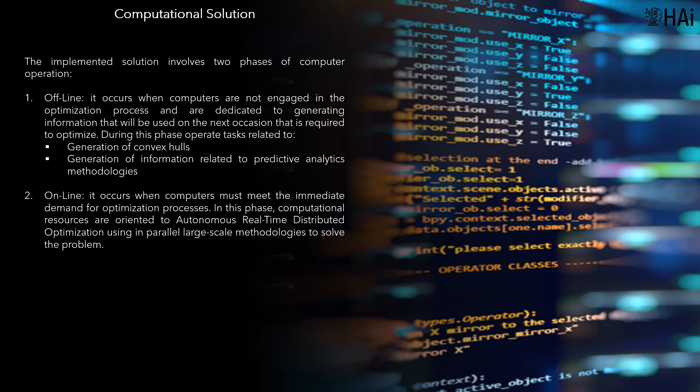Online, it occurs when computers must meet the immediate demand for optimization processes. In this phase, computational resources are oriented to autonomous real-time distributed optimization, using in parallel large-scale methodologies to solve the problem. The offline convex hull generation is a semi-automatic process, which must be performed when new products are going to be incorporated into the pipeline.

It can be carried out in parallel, since strictly each point of the grid can be optimized independently for each product in each pumping station. However, the chain sequential optimization of a product in a station can take advantage of an optimization process that considers how the grid is covered.

The online optimization is a process that in its first part is not parallelizable. This is because displacement of all tenders are intertwined. The adjustment of the operation of the pumping stations is parallelizable, which can accelerate the final optimization when the number of periods of the planning horizon is large, that is, when the duration of the periods tends to zero. This is typical of optimal control models.

To solve the problem, a set of GAMS programs were implemented. The main characteristics are basic solvers, linear mixed programming, IBM CPLEX, Gurobi, and/or Xpress, and nonlinear programming, CONOPT.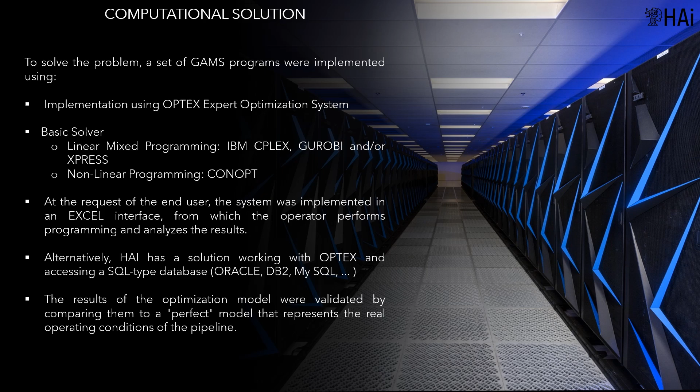At the request of the end user, the system was implemented in an Excel interface, from which the operator performs programming and analyzes the results. HAi has a solution accessing to a SQL-type database, Oracle, DB2, MySQL, etc., and the results of the optimization model were validated by comparing them to a perfect model that represents the real operating conditions of the pipeline.

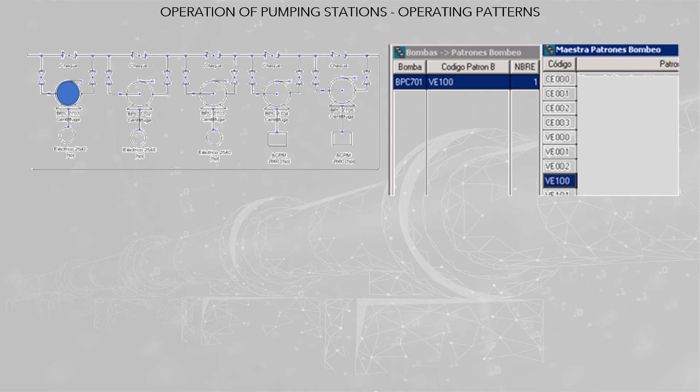The screenshot presents a shell window containing the master table of pumping patterns, and the data window containing the table related to the patterns. Image shows an example of the pump configuration BPC 701. Image shows another example of pump configuration BPC 701, using 3 pumps.

Case: Oil Express Pipeline Real-Time Optimization. Description: The Oil Express pipeline is composed of 2 pumping stations and a maritime terminal, FSO terminal. The crude oil is stored in tanks and then transported by the submarine pipeline to the floating oil storage unit for the loading of the tankers.

To ensure the quality of the results, it is necessary to connect a hydraulic simulation model of the pipeline system with a hydraulic simulation model in the optimization model. This process has the following steps. Calibration of the simulation model, which represents the pipeline in full detail. This model must be calibrated against reality.

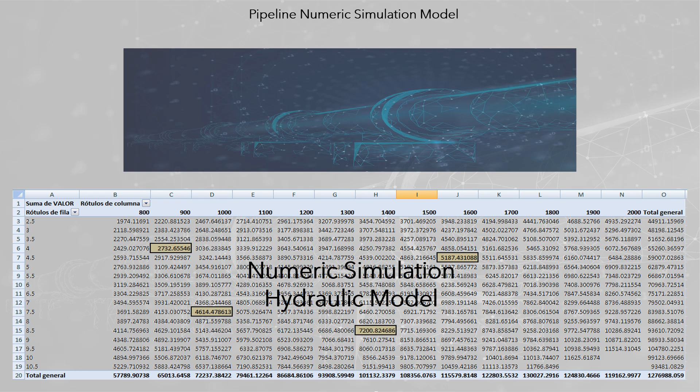The result of the model is presented in tables. The model in table format is not easy to incorporate into the optimization model. An alternative is to convert the table into a continuous model, using a regression model. These 2 models are run offline, and their results can be stored in the offline database. The results of the pipeline approximate regression continuous simulation model must be compared with the original simulation model.

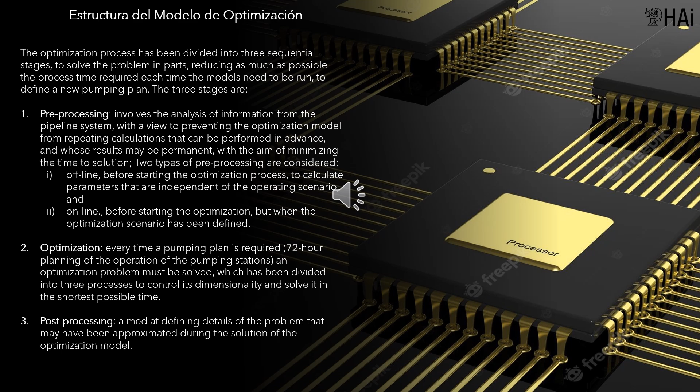Post-processing, aimed at defining details of the problem that may have been approximated during the solution of the optimization model.

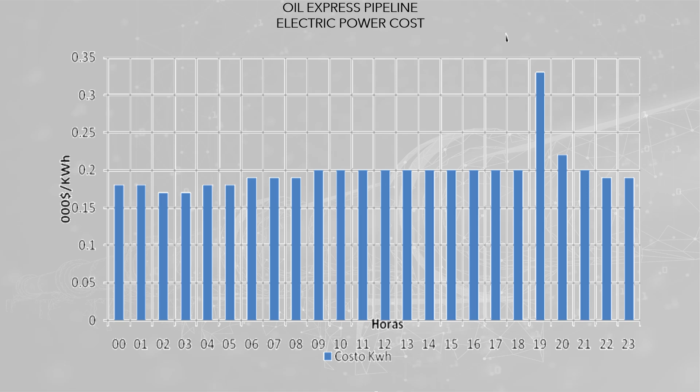The graph presents the costs of the energy used in pumping stations. Pumps 2 and 3 use fuel oil, pump 1 uses electricity. The electric power cost changes during the day, considering the hourly seasonality of energy demand. As it can be seen, at 1900 hours there is a peak in the cost of electricity.

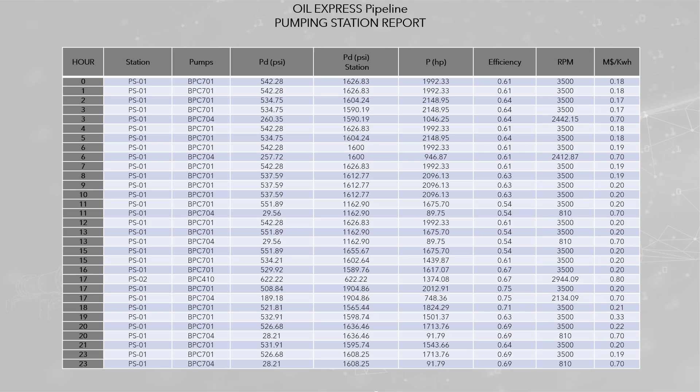The table presents the results for stations PSO1 and PSO2. The table presents the report by pump. It contains the name of the station, the type of pump that operates, the discharge pressure of the station. This is discharge pressure of the pump minus control valve, the power consumed by the pump, the efficiency, and the RPM at which it is operating, and the cost of energy at the pump for that hour.

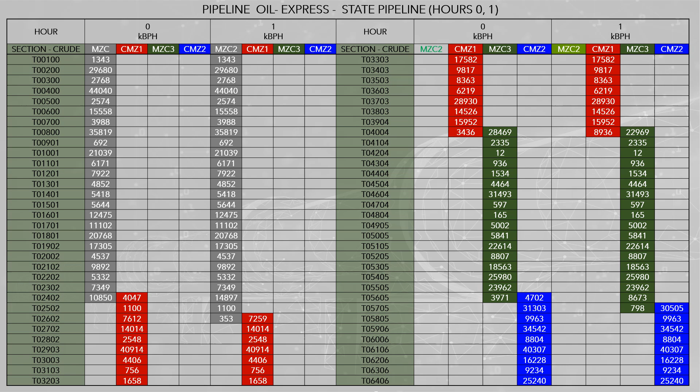For each hour, it is indicated in each section, the batch that is passing. To compare pipeline operation policies, 2 experiments were conducted: economic policy, minimization of the cost of operation, green line, and environmental policy, minimization of energy consumed, blue line.

Comparing the results of the objective function of the 2 operating policies, it can be observed that the minimum energy policy generates 16.21% of overcost, and the minimum cost policy generates 19.43% of overconsumption. As you can see, the differences are not negligible, and are a measure of the precision that mathematical models can provide when solving real-life problems. Estimating this difference based on good practices and/or mental models is practically impossible.

Homeland Security. Case, Defending Critical Infrastructure. This section is based on the paper 'Defending Critical Infrastructure.'

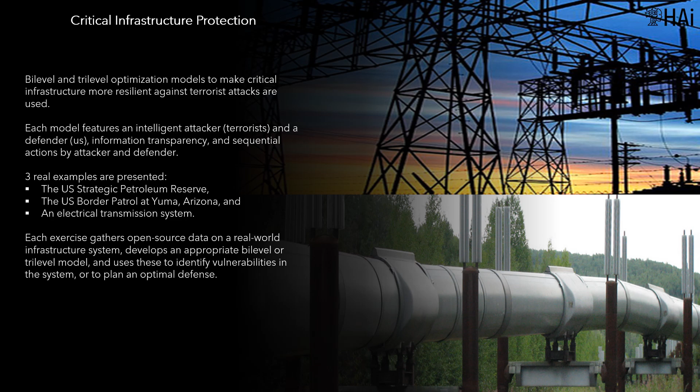Each exercise gathers open-source data on a real-world infrastructure system, develops an appropriate bi-level or tri-level model, and uses these to identify vulnerabilities in the system, or to plan an optimal defense. Only the first case is discussed in this presentation.

Attacker and defender models. The core of an attacker-defender model is an optimization model of an infrastructure system whose objective represents the system's value or cost to the defender, our society, while it operates. For instance, the maximum throughput of a pipeline network could measure that system's value, while power generation costs plus economic losses resulting from unmet demand could measure the cost of operating an electric power grid.

Attacker-defender model. It is assumed that the defender operates a system to minimize cost, represented by an objective function. The defender is a misnomer in these models, because the models do not directly represent defensive actions. Calling it a system operator would be more accurate, but awkward.

The model posits that an attacker wishes to maximize the worst damage he can cause by restricting the defender's operational activities. The attacker determines an attack plan, AP, in which he specifies which assets of the defender he will attack. Attacking an asset prevents the defender from carrying out activities that depend directly on that asset.

To determine the set of activities included in the AP, the attacker solves the optimization problem, AD, which is a type of bi-level program. A bi-level program is a type of Stackelberg game. Here, the terms leader and follower in a Stackelberg game represent our attacker and defender, respectively.

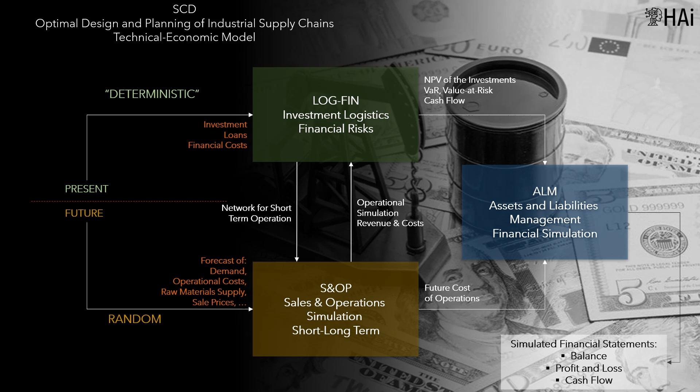The third model will be called ALM. Its objective is to simulate the assets and liabilities management, ALM, considering the results provided by the LOG-FIN and S&OP models. ALM is a consolidated modeling methodology that focuses on the financial modeling of companies. Its growth was generated at the end of the past century, in the financial sector, as a result of the Basel Accords.

The minimum ALM modeling should be oriented to evaluate the NPV, for a pre-established ROI, return of investments. It will provide the financial statements: balance sheet of assets, liabilities and equity, income statement, profit and loss after tax, royalties and other contributions, and cash flow.

Extended ALM modeling may include investments in alternative assets and liabilities, payment of dividends, capital repatriations, capital flow, and multiple currencies. In healthy logic, this model must be the coordinator of the holistic investment process, since it is the financial vice presidencies of the organizations responsible for endorsing investments in production assets.

The results of the holistic optimization process are probability distribution functions, for the primal variables and the dual variables of all DSS models. For example, the NPV. In simpler modeling, these distribution functions are obtained using spreadsheet simulation models. The results are not comparable, because of the methodological difference in the approach.

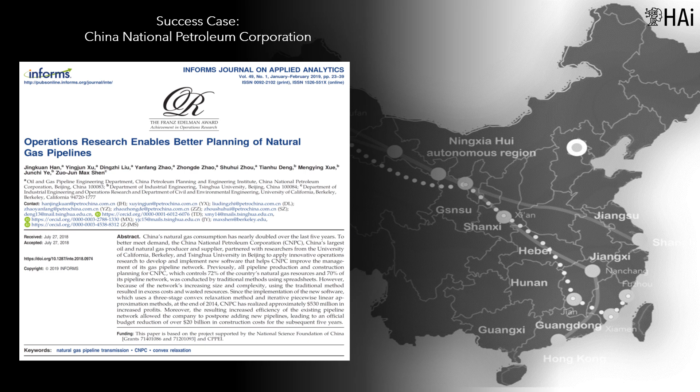Success case: China National Petroleum Corporation. The paper 'Operations Research Enables Better Planning of Natural Gas Pipelines' presents the use of mathematical optimization models for pipeline planning.

China's natural gas consumption has nearly doubled in the past 5 years. To better meet demand, the China National Petroleum Corporation, CNPC, China's largest producer and supplier of oil and natural gas, partnered with researchers from the University of California, Berkeley, and Tsinghua University in Beijing to apply operations research to develop and implement new software to help CNPC improve the management of its pipeline network.

Previously, all pipeline production and construction planning for CNPC, which controls 72% of the country's natural gas resources and 70% of its pipeline network, was done by traditional methods using spreadsheets. However, due to the increasing size and complexity of the network, the traditional method resulted in excessive costs and wasted resources. Since implementing the new software...

...which uses a three-stage convex relaxation method and iterative piecewise linear approximation methods, in late 2014 CNPC obtained approximately $530 million in increased earnings from 2015 to 2017. In addition, the resulting increase in efficiency of the existing pipeline network allowed the company to postpone the addition of new pipes, leading to an official budget reduction of more than $20 billion in construction costs for the following 5 years.